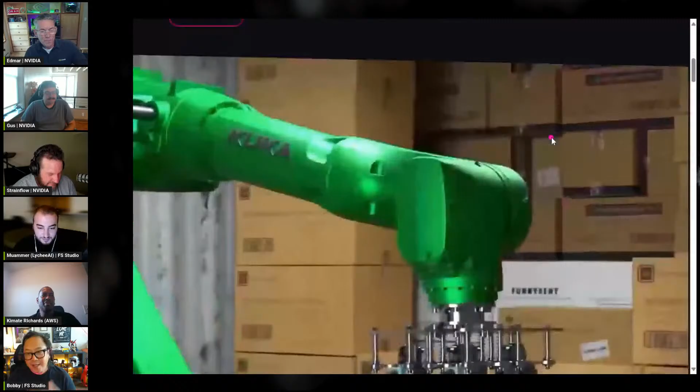And it goes from working on the robotic side of things, and you'll be surprised at what companies are very interested in robotics and robotic simulation. Companies you would never even imagine. There are a couple companies I even mentioned in that list that you're like, wait, what? They're involved in robotics, and yes, they are. And so it's really the idea of autonomous systems and intelligent infrastructure, and all of that work has been really awesome. The current projects we have, projects that we've had going on for a really long time.

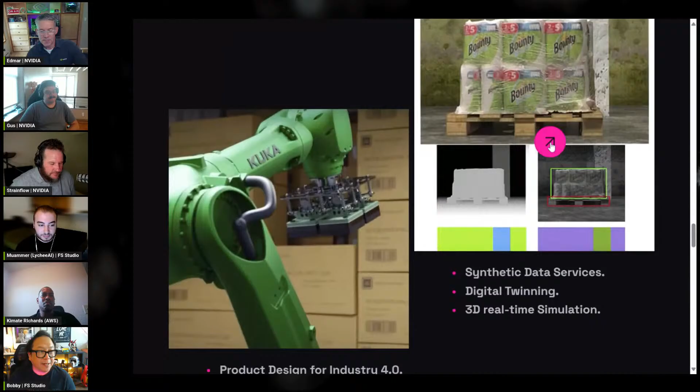And Muammer came along when we knew about his content and just how brilliant he was and how great he was on camera. We just liked a lot of things about him and the kind of content he was delivering, especially his works in robotic behavior and all that. And for us, it was important: we have a great simulation team, we have a great robotics team, but we needed someone like Muammer to come in and almost become a face for us in this dev world.

Again, I always joke around, I'm not a dev. I do have some knowledge of it, but if you were to corner me and start pressing me for dev information, I would cave and be like, oh, I can't help you. But we need a guy like Muammer to help with that. So it's been a great journey, and having him on the team has just been spectacular.

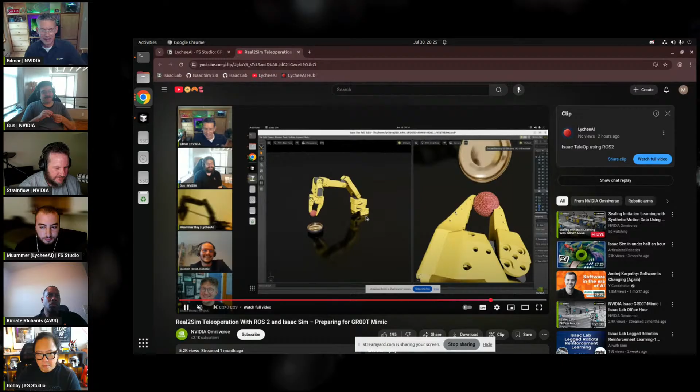Basically, I still can't get over how quickly you went from end to end to get that working. It took quite some time. Oh yeah, okay sorry, I don't mean to—yes, it took quite some time. But I'm still impressed, compared to the way it used to be before Isaac Sim and Isaac Lab and stuff, it's blowing me away. Well, I think also, Gus, it's just the number of days it took him to get that far that blows me away. But I think what Lychee might be saying is, yeah, I didn't sleep very much.

Yeah, it took a minimum of 2 to 3 weeks, so that's quite some days. I'll share the steps I take and show it in real time, what I did. And if I fail, I still have a backup, so I hope everything goes good, but just in case.

In the second live stream, I shared how to control it via ROS2. Back then I was using joint states, but this time I'll be using TF2. I won't go into detail, but those familiar with ROS2 will probably know TF2. I first have to give some rights to read the joints and positions from the servos.

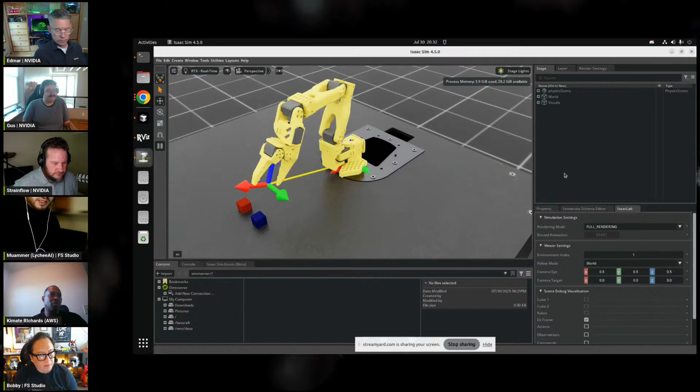Yeah, okay, so I'm not sure, maybe it's possible with joint states, but I didn't manage to make it work. And so right now I'm teleoperating the real robot, and it's in Isaac Lab. So it's very similar to the joint states, but it works with inverse kinematics, like you mentioned. And in this script, I can also reset every time I don't like the position of the robot, or when I moved it and I have to move it back.

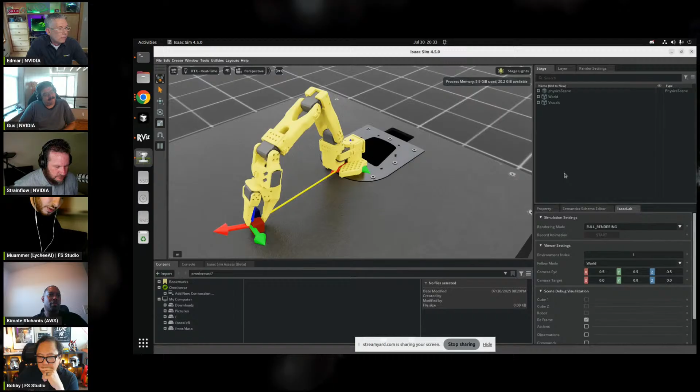So in this example, I also included a binary action joint for the gripper, which I can activate with a keyboard command to make it a bit simpler. So if I press the button, it will grab the cube. And once I put the red cube over the blue cube, it will basically assign. It auto resets the environment because you completed the task, right? Exactly, yeah, that is defined as a successful task.

I kind of followed the tutorial from the Isaac Lab documentation, but I just excluded one cube and made two to make it simpler. So yeah, that was the teleoperation script.

One thing, just real quick, I think it makes sense to add this kind of workflow into the documentation, given that a lot of developers are coming from different places. It's really difficult if you don't know any way, whether you have the follower arm, you don't have the leader arm, you have Apple Vision Pro, a Meta Quest, or whatever it might be. To have these different possibilities, at least one representation of the possibilities. Yeah, I am inclined to it.

So we have walkthroughs for other parts like RL training and stuff, but for teleoperation and imitation learning, this section of the docs really is it, unfortunately. So I agree, yeah, we definitely need to add something like that. And I think this workflow example that you've developed, Muammer, is a great target for it, for sure.

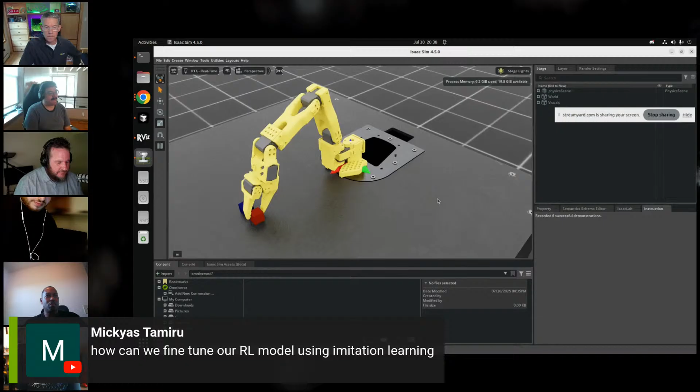Yeah, well, the policy just defines the mapping from state to action, right? And if you don't have a sufficiently broad distribution of data when you're fine-tuning your RL policy to behave in this specific way using imitation learning, then you're going to get a bad result. But anyway, totally. There's tons of different ways to do it.

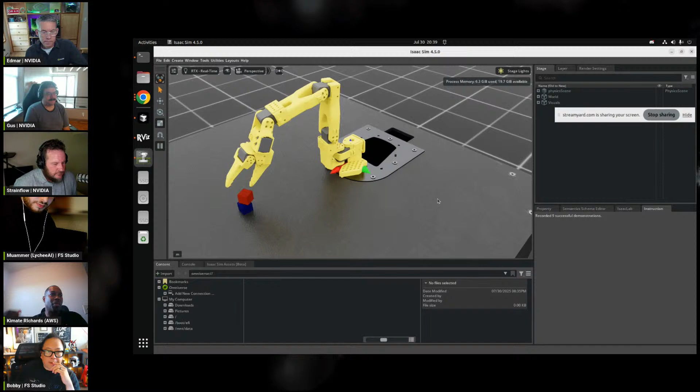Tons of different ways. Real quick, just to plug LeRobot, they've made this kind of tutorial on using the SO100 arm that goes through the imitation learning to RL process. The entirety of the process is right there. Yeah. It does not include Isaac Sim and Isaac Lab, but there's other folks like Muammer, myself, that have created little tutorials on how to do this within the context of Isaac Lab. Yeah.

I'm just saying, even though the tools may be different, the methods that are used in that are going to be exactly the same. And there's explanations. I think if you pair that with the new course from NVIDIA, I forgot the name of the course, but it's about reinforcement learning. It kind of talks about the methodologies behind what you're doing, but then you can use LeRobot as a companion to that, absolutely, and work together.

Well, and I think it also depends what your goal is, right? If your goal is to come up with new types of policies that can do extremely complex and long-running tasks, that's more on the research end, and you're going to be asking one body of questions here.

If you're more industrial of mind and you want to do some practical things today, then I would say rather than come up with more complex reinforcement learning scenarios, the tools that we have right now can help you do simple navigation tasks and simple manipulation tasks, and even with a state machine do combined mobile manipulation tasks. And if you can keep your tasks simple and straightforward, then you can train for that with just the existing tool set, you know? Right. So I think it depends what you're trying to accomplish.

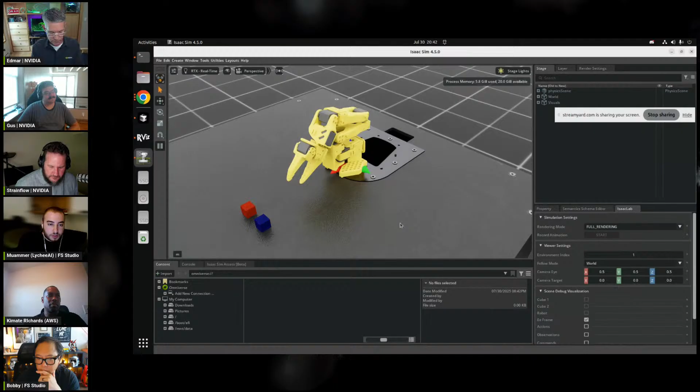So I will start it, and once the cube is grabbed and slightly lifted, for example, right now, I'm pressing S to annotate it. And what you just saw was something that didn't happen in the record dataset script. For example, that he kicked away the blue cube. This happens because every time the scene resets, it is not 100% deterministic. So this can happen, and therefore you should collect more data.

So the second one, I will also do the same. So what I realized, it's kind of important that you really wait until the first task is done and not annotate while the task is present. So for example, I'm waiting after the cube has been grabbed and slightly lifted. So yeah, once I annotate all of them, I guess we can go over a new question as I'm annotating these.

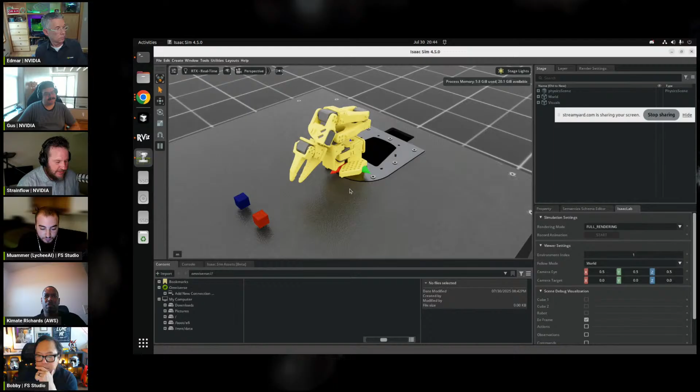And essentially, those annotations are, you're marking, if you have like the 3-step process here, whenever it's completed the end of one of those steps. Is that right? Exactly, yeah. You know, it's got to the cube, it's grabbed the cube. And what Groot Mimic will do is it'll take each of those steps as a kind of a unit and kind of flip and reverse and mess with each of those steps, if I understand it right. Yeah, I think we will come to that in a moment.

So basically, the scene will be randomized. I guess that's what you meant. And then the trajectories will be basically interpolated. So right. Yeah, these are novel. These will be novel generated data sets, which then can be used to train an imitation learning model. And yeah, we will get to that in a second.

Do we want to answer a question or two while he's annotating that data? Sure. Yeah, I mean, sorry, go ahead. I was just going to answer a couple of questions since they're quick ones. Go for it.

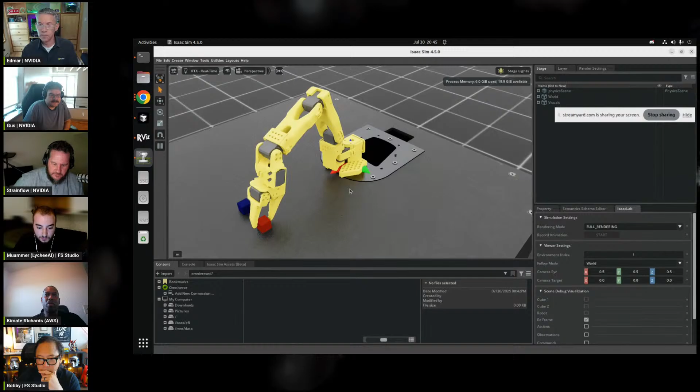One from Jan. It says, what use case can you think of training a robot where one would need an Apple Vision Pro and XR Stream, meaning no high-end workstation to stream to Apple Vision Pro at hand? You don't need an Apple Vision Pro. This Apple Vision Pro just luckily has a LiDAR within it, so it allows you to capture the hand depth and tracking much easier. Having an Apple Vision Pro is great because it already has a streaming pipeline, but it's not necessary. I could see a use case when you want to have people doing some hand operations and you want the robot to be retargeted, retrained, and mimic the hand operations. That's why you might want to use a Vision Pro.

But other than that, certainly we have leader and follower arms for the SO100. You can just use those. And similarly, if you use some of the other robots out there, I'll stop because we have not a lot of time. But you could use leader and follower arms. You can use keyboard, mouse. You can use a joystick controller. All kinds of different things. These are just common pipelines.

There's another really quick one from Garv. It says, if there is a complex task that requires a lot of steps, does that mean that you would have to annotate all of the substeps manually? Yes. Yeah, maybe just to add quickly, from the Groot Mimic live stream, it has been mentioned that it should be kept as little as possible to not make it too difficult, I guess. But you can also set up an automated script to annotate these. So basically, you can have something like, okay, when the cube is grabbed, I will wait a few milliseconds or something, and then annotate it itself.

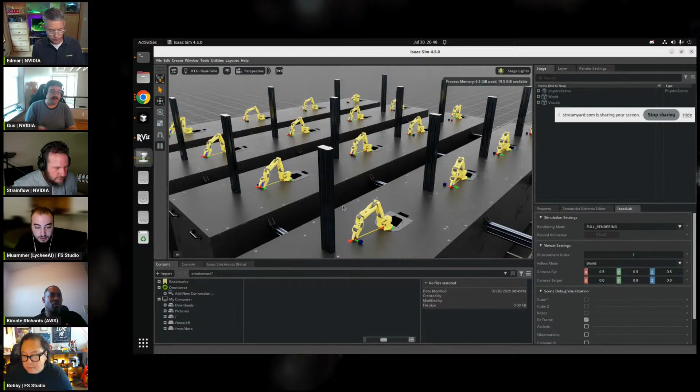So to be clear, what's happening here is that each robot is going through trying to stack the red cube on the blue cube in a novel way. And some of them succeed and some of them don't. The ones that succeed, you record and save for later. And the ones that don't, you discard. And what you're saying is that so far, of the trajectories that we've generated, about 40% of them have been successful and saved for later use.

Exactly, yeah. Perfect. Thank you for mentioning that only the successful ones will be saved. That's very important. But sometimes you want the unsuccessful attempts in your data set to some degree. Otherwise, the robot doesn't know how to recover unless you manually teach it how to recover, which is also a problem. Sure. But you notice steadily that the percentage of success is climbing slightly, right?

Well, I saw it kind of going up and down. Yeah, I'm not sure if that's actually training. I think it's just generating data, right? Yeah, I don't think it's training yet.

There have been a few questions about longer tasks and more complex robots like humanoids. My understanding is that Groot Mimic can do more complex robots, and it'll try to do whatever task you throw at it. However, the more complex tasks and robots would probably have lower success rates. Well, and remember the big thing for Groot Mimic is that it's data generation, right? And if you're using complicated robots that move around the environment, there are different constraints on that data generation than there are for a fixed base robot arm.

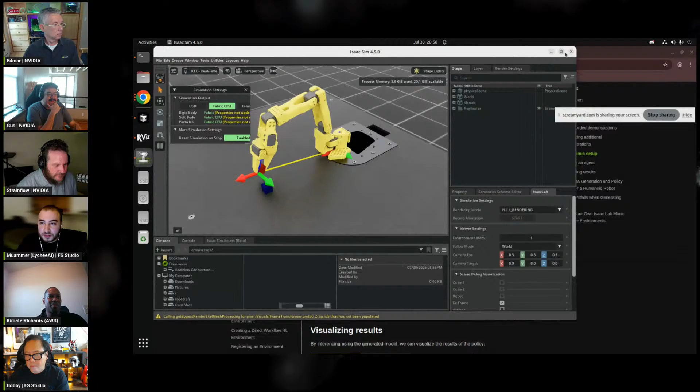I think so too. I thought that there was a link to the official page or paper, but I don't want to say something wrong. So I need to dig into it more myself. So I already launched the script. As you can see, the first 2 trials were successful. So I guess I will just restart it. I missed showing it, sorry.

So while it's loading again, I just want to mention that I've trained it for 1000 epochs, and this took something like 10 to 15 minutes, I think, or maximum 30 minutes. So I could probably train on more data. And this one is done using, I think, 1000 generated datasets.

So as we can see, this is now an imitation learning model that is managing to do the task. It's not perfect because I maybe didn't use enough data or didn't train it for long enough, but it's managing to do the task. So in my eyes, it's very ready for Groot N1.5 training. And it is behavior cloning.

So what's going on here? You're using the RoboMimic pipeline to do the actual training part, right? So we've used Groot Mimic or Isaac Mimic, depending on our names. So that was what I was saying about before, NVIDIA's naming conventions.

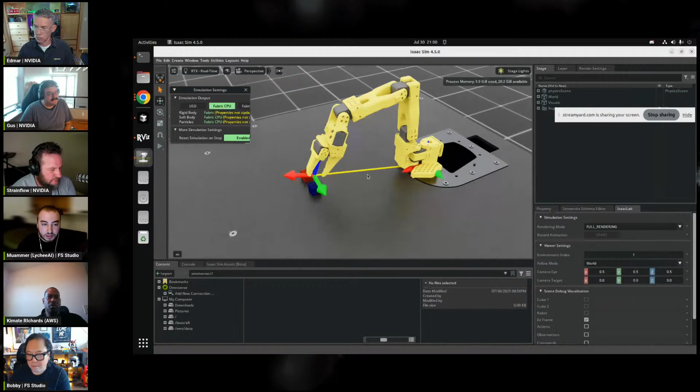So here Tom is asking, is Cosmos being used in the synthetic data process? It's not, right? Yeah, so it's not yet. So that would be my next step. So basically, now that we have collected this HDF5 file format with all the data that we are including, it is recommended to get these demonstrations into Isaac Sim to leverage Replicator or the Cosmos Writer, which is, I think, an extension to Replicator, to create a scenario with different types of metadata, like depth or canny edges or segmentation. I think maybe an image would be the best.

So I think if I Google just quickly Groot Mimic blueprint. I think you showed it before. Oh yeah, I have it on the screen. You're looking for the blueprint page itself? Yeah, I think I found it. I think it should be this one. Yeah, that's it. So basically what we will do, I think it's not shown here, but I guess I would have to search another page if I have 2 seconds.

Well, actually, while we're on that, someone also asked if this could be used for things other than robotic arms, and absolutely. That's what I was commenting on before. The data generation process that we're using right now is focusing on robotic arms, but especially for that third step for Cosmos data augmentation, there's no reason why it has to be a robotic arm. I just think that with our current methods, for the imitation stuff, you'll find best results with robotic arms than you will for mobile robots. But that's going to change as we develop things, right?

Okay. Well, or with like bimanipulators, like humanoids. Yeah. I think that it would probably work okay with bimanipulators, but you're going to have to tag more of those actions, and your success rate is going to drop. And if you try to go with too complex of a robot, I think that success rate might drop so low that it's not really helping you much.

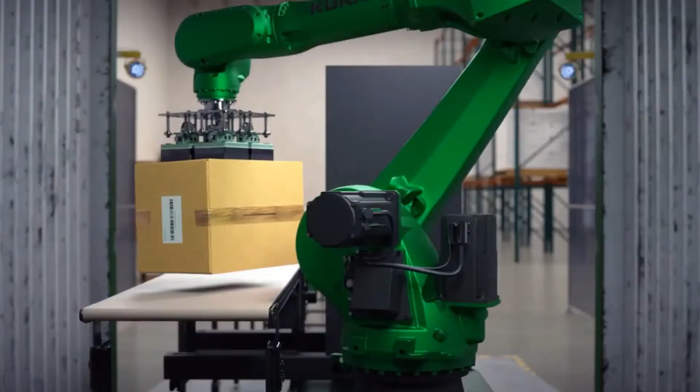For AWS, I actually write the AWS Apple Vision Pro tutorials, so I can also answer this question. Oh, Kimate, amazing, no worries. If you go to the AWS channel, you'll see my face all over that. But yes, you can use the Apple Vision Pro - all of its low-level libraries are accessible to you.

If you have the enterprise entitlement, you can actually see what's in the camera. There it is right there, the video. Oh, I just stopped it. Maybe you can replay that again.

To see the camera, you need to have the enterprise entitlement for the Apple Vision Pro, which means you have to be a company or a developer working for a company - that's the only way you can see the camera. But you get essentially a data representation of what's in the camera, so they'll say like here's a human hand, here's the points of the hand, what the quaternion of the points are of the hand. So you do get a representation of the data in front of you, but for privacy reasons, they don't let you access the camera directly unless you are a company working on an in-company application - right, yeah, an enterprise account, which we have, the enterprise access to cameras.

Amazing, okay, that's so great. I'm so glad. Another great reason to have you here, Kimate. Thank you, let me see.

So Eric, I just have to say, Eric had to drop while I was playing the video. He said goodbye, he was waving. Nobody could see him, but he was waving. Thank you, Eric, for jumping on today. He has a conflict with the meeting right now.

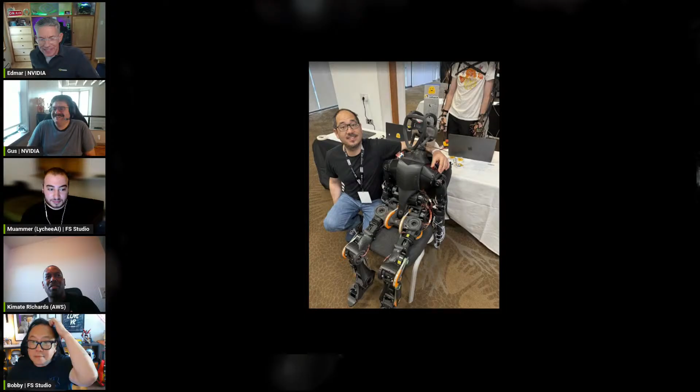Oh excellent. So at AWS we're working on similar things that Lychee and others are working on, except we're trying to make sure it scales for enterprise use. We're building out these pipelines that do some of the similar things that you see from Muammer and others. We're also partnered with LeRobot - you can see there's Rob Knight, that's the Hope Jr. arm, this is Rob's creation for LeRobot. Some of the software on it was created by me, some by Remi Cadene, and some by the gentleman behind you wearing the teleoperation gloves. It's completely open source. We're looking for contributions, including folks that want to be involved in the Isaac Lab portion of this, so we'll be using Isaac Sim, Isaac Lab, Groot, and whole body controllers. We need folks that want to come help us out on the LeRobot Discord channel.

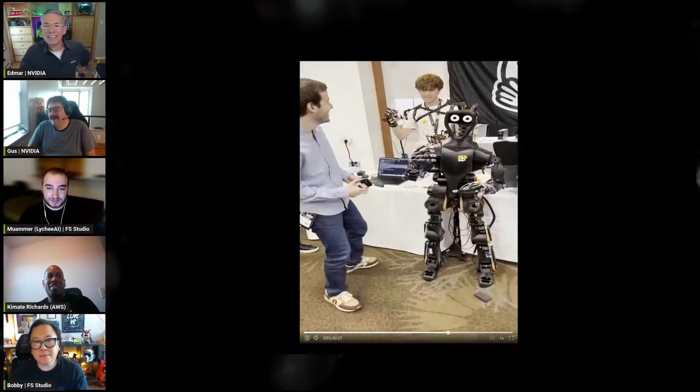I love it, yeah, a couple more things. This is Remy, and I'm the cameraman back there. And this is the LeRobot - I'm sorry, the Hope Junior running. So that's it, it actually stands, and now we're getting it to walk. We gotta get that into Isaac Sim.

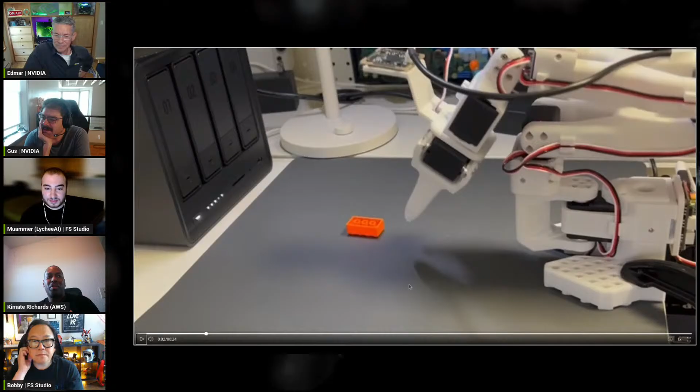I guess we can skip because I want to just keep the time going here, I'll skip a couple of these. So what we're doing is that imitation learning, reinforcement learning pipeline - we're scaling that out on AWS. The other thing we added, and this is kind of the coolest part, is this agentic workflow, allowing the agentic models to take over the imitation learning pipeline.

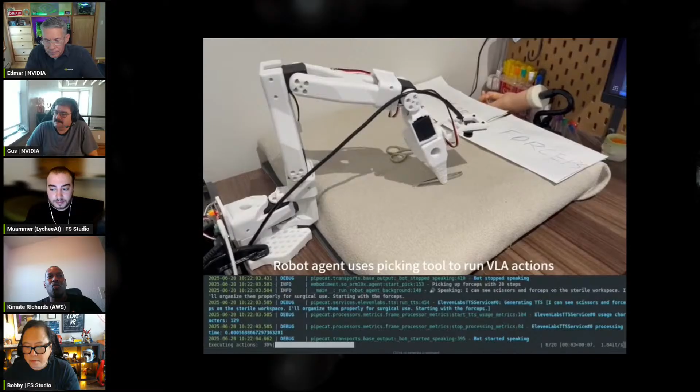So just imagine if you haven't done something before, and let me just play this one. I'm playing it with the sound off, or maybe I'll try the sound and see if you guys can hear. So I don't know if you heard that, but he said, help me prepare the instruments for surgery. This is actually using GenAI to run a policy to pick up the appropriate forceps, or tweezers, or scissors, and then it's sending the chunking actions to this robot. This is an SO100, so it's a little bit shaky compared to the 101, but it's using the camera, using Isaac Sim, Isaac Lab, all those kinds of things in the background.

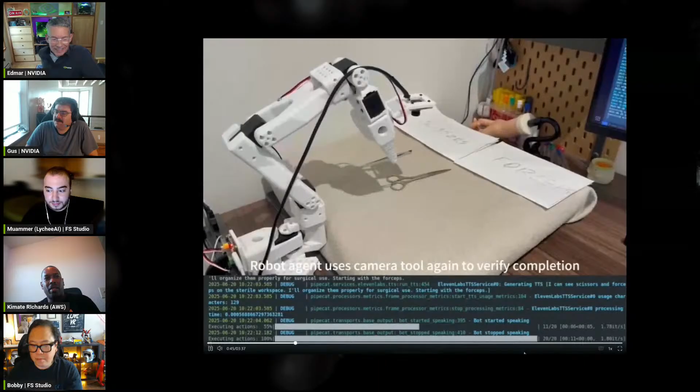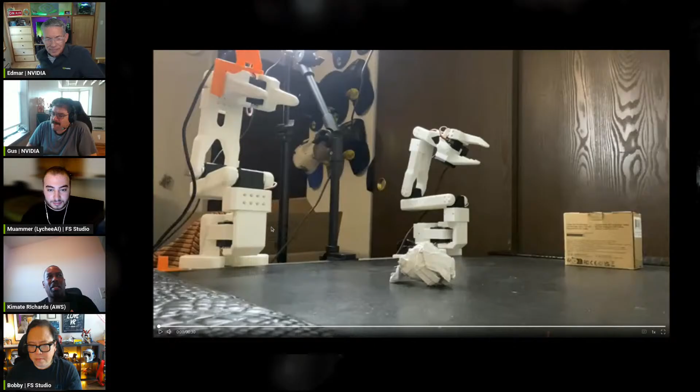Wow, that is so wild. Yeah, wow. And the cool part about that is then you're now using an agent, which means you can make it do all kinds of things. This is one of my college students - oh, I should mention the person that developed the last one, his name is Aaron Su, along with Frank from AWS, they're solution architects on my team. And here's one of my college students who's made a dual arm.

So this dual arm now is the same concept, will be running on Isaac Sim and Isaac Lab. And now he's about 40% successful in getting the trash into the trash bin with the dual arm. Amazing. So that's, I think I've exhausted my 2 minutes, so I'll stop there. But

look for some stuff from AWS coming soon, and also look for a basic tutorial. I'm also trying to work with Muammer and others to try to put up more content. I don't put up really good looking content, but it has a lot of depth, hopefully. So hopefully using other folks, it'll be a little bit more easy to digest content. Okay, 2 minutes. That was it.